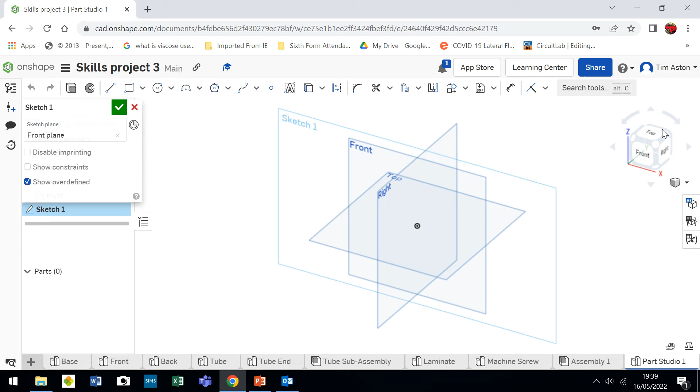I'm going to select the front plane and do a sketch on that front plane. I'll look at it from the front, and we want to draw a circle that is 35 millimeters diameter.

What I'm then going to do is just do our little thumb grips. I'm going to draw another circle on the edge of it, maybe a diameter of 5. Left click 5, return, and I'm going to trim that part away.

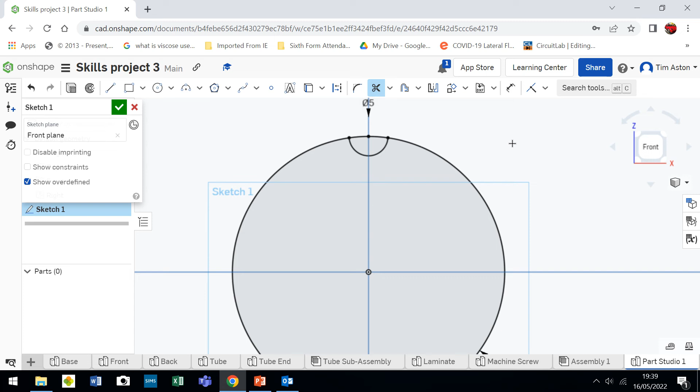What I want to do now is repeat this. So I'm going to press escape, select that, and go for a circular pattern. If you notice, it's selected the center of there and transformed it, rotated it 3 times around that central axis. What I can do now is double click on the 3 and change that to 7, and it's repeated it 7 times around the center.

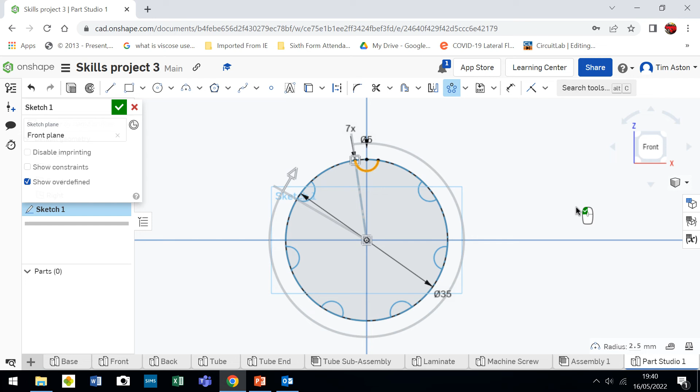So I'm going to click the select tool. We've come out of the sketch, but I'm just going to go back into it, and what I'm going to do now is trim away, nibble away all these parts here that we don't want.

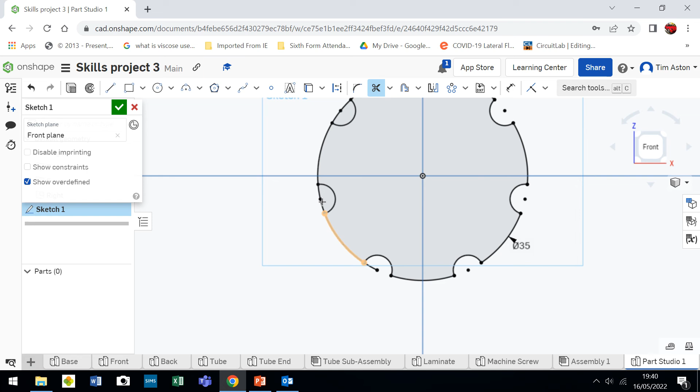Just the final 2 there, and click the tick to confirm the sketch.

Go for an isometric view, and we're going to extrude this through 4 millimeters. Extrude there, and it's set at default 25. I'm just going to go for 4, and click the tick.

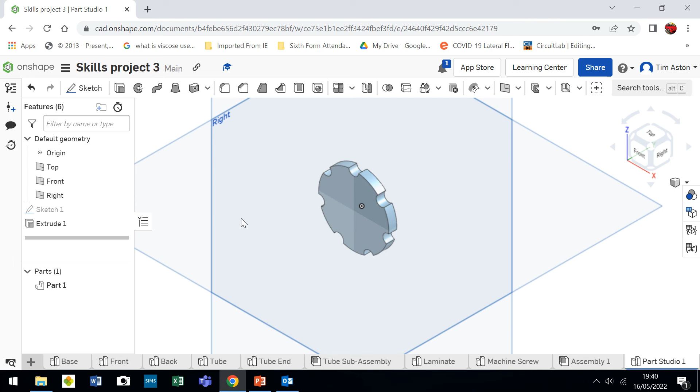We want to use a fillet tool on here just to, and obviously you can change this to be whatever you want, you might have different patterns or something like that, put your name on it. But we then want to use the fillet tool, and I just want to knock a radius around that outside edge. So I'm just going to click those edges there.

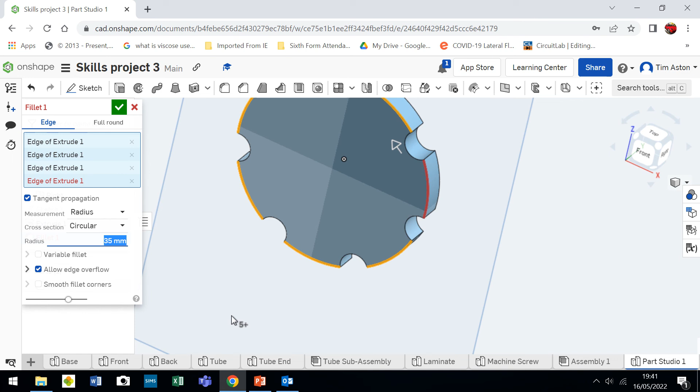Every time it goes orange, we know we've selected it. I'm going to have a fillet radius, this is 4, let's go 2. Click the tick to confirm, and it's just given us a nice little fillet around there of 2 millimeters.

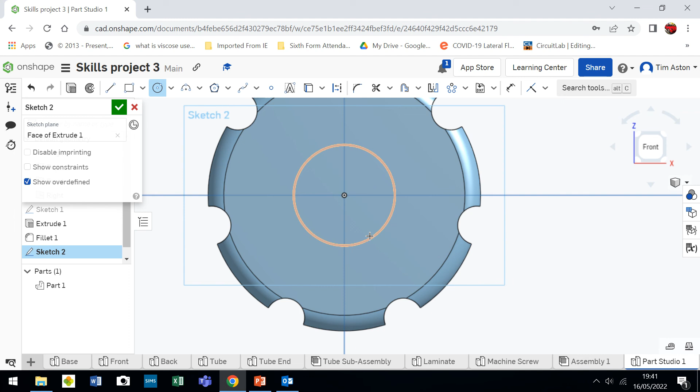The next thing we want to do is create a sketch on that front face there. Look at it from the front, and I'm just going to draw a circle with a diameter of, let's go for a diameter of 4. Click the tick to confirm.

And I go to the isometric view. What we're going to do here is create a hole. So instead of extruding, I'm going to use the hole tool. I like the hole tool, it's good. So I'm going to select this central part of that there.

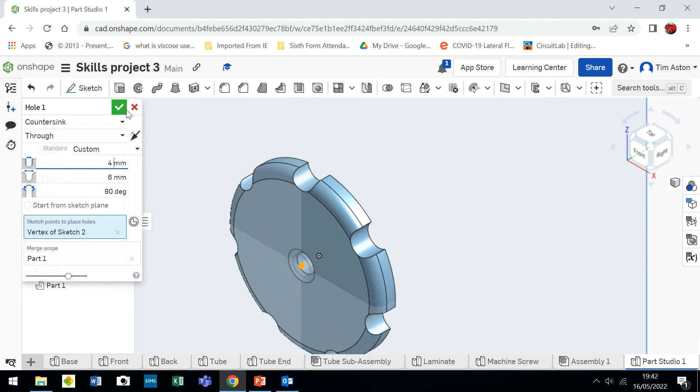If you look, you can change the settings here, but mine at default are a 4 millimeter diameter hole with a 6 millimeter countersink across and a 90-degree on the countersink. So I'm going to click the tick to confirm, and that will be our 3D print.

What I will also do is, as it's 3D printed, I'm just going to change the color of it. So I've selected that, go to the appearance panel and double click on that light blue there, and we're going to have it sort of a violet color.

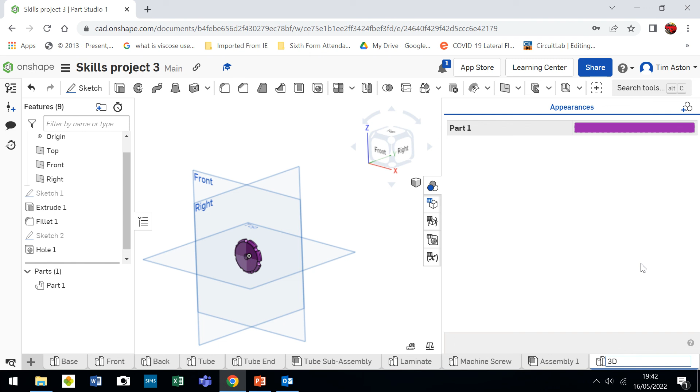Click the tick to confirm, and we're going to rename this part now, rename 3D print, and we can click that to confirm. And there we are, we have our 3D printed handle.